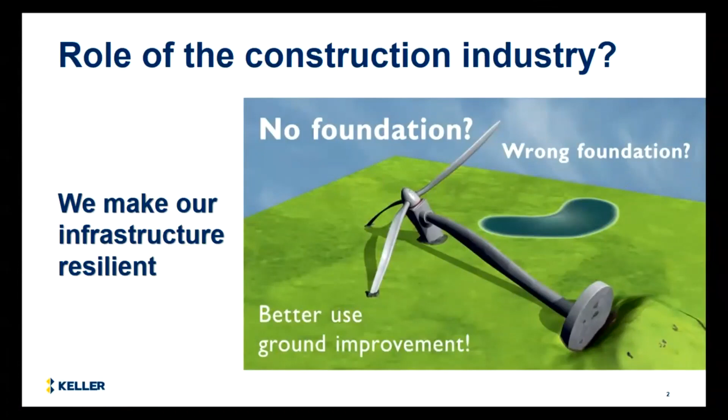Thank you very much. Well, I'm presenting the industry view on that and also recapping a little bit on the panelist discussion which we had previously. So we as an industry, what is our role? Our role is basically to build this resilient infrastructure. So that means we put piles or other elements into the ground where this infrastructure is resting on.

And well, you have probably seen a number of definitions for resilience, so I can skip this probably. The strange thing is, if you look into all those formal documents which we use for design, for example, into standard codes, and you are searching there for the term resilience, it doesn't really appear. So maybe you'll find it in a foreword, but it's not even a defined term. It's just used as a word.

There are other terms, and here you have a short view on what is coming, and the terms that are used are terms like reliability, and this reliability is probably the main term. So the main concept which is used in our current and future generations of design codes, and this covers safety, serviceability, as we have established in our previous discussion. That's a bit like performance, durability, and also there is another term, and that is robustness.

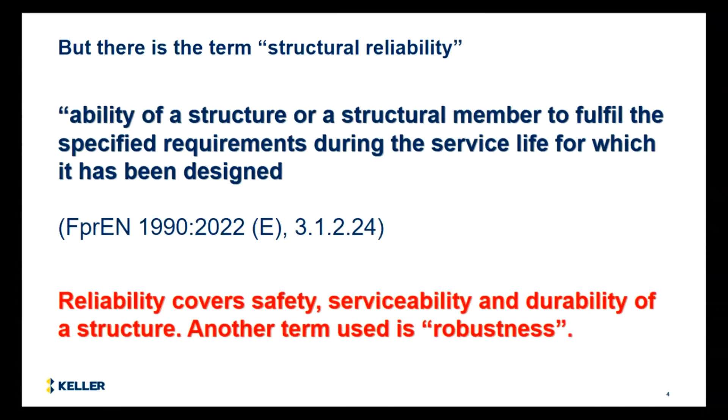Well, you know, currently, if you look into the codes, you have to make a design. First of all, it's ULS, and as a second term, SLS. Well, historically, of course, ULS has been the dominant one, and SLS was nice to have. That has changed. So already in the current generation of Eurocodes, ULS and SLS, I would say, are equally important. And as we have seen in our discussion, SLS most of the time is controlling our designs.

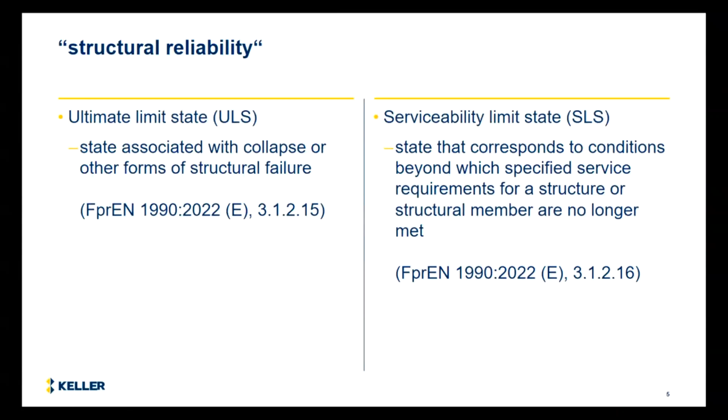So we install piles, and basically they would have a bearing capacity, but sometimes the deformation is limited, so I'm not allowed to use this design bearing capacity fully. And there are, of course, definitions for robustness and durability to be found in those codes. And as we have seen, most of the time, still this boils down to certain factors of safety, and those factors are then used to determine quantities.

So basically, what we as a contractor want to know when we go to a site is how much do we have to do for this project. So that means how many piles, what diameter, what length, how much reinforcement. And the, let's say, conventional wisdom is that if we stick to all those current regulations, we do nothing wrong, and the result is assumed to be robust, durable, so in other words, resilient.

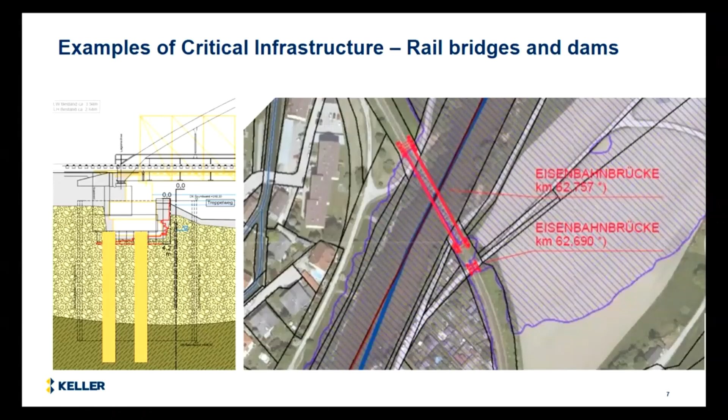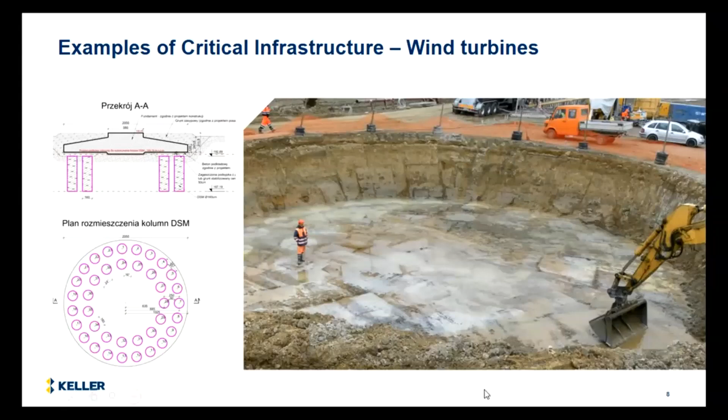How much cement do I need to mix into those columns so that I achieve a certain material strength which is sufficient? So in all those designs, the sequence is basically, I need to make sure that at least the internal force in my element is not exceeded, because once that would be exceeded, I would have something like a system change, because then the column crumbles and I have a different system. I want to avoid this. So this is also something that is covered by the way we do design today.

Of course, sorry, was a bit quick.

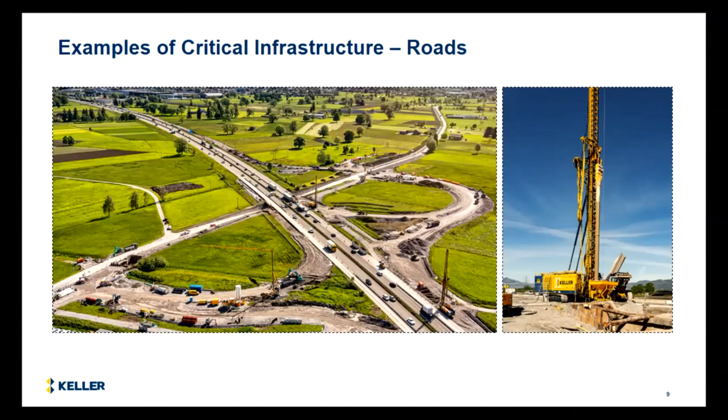Another critical infrastructure is tunnels. And of course, in tunnels you have to make a distinction, because the tunnel itself is a permanent structure, but to build the tunnel you have a lot of temporary works to do. So you have excavation support, which is only needed as long as the full tunnel is not finished. Once the tunnel is finished, either completely or at least large parts of it become redundant, obsolete. And the question is, can I make a distinction between temporary works and permanent works?

In Germany, we are used to that. Currently in our version of the Eurocodes, if you look into the tables for safety factors, we have 3 columns: one which is permanent, one for transient or temporary structures, and one which is accidental. If you look into the future Eurocode, at least in the original version as CEN is looking at it and trying to publish it, this intermediate line, temporary, transient, is disappearing. So the factors for transient and permanent, at least in that form, will be identical.

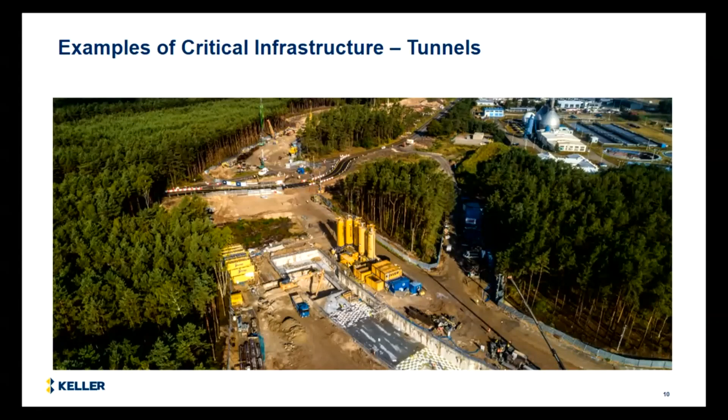And at the moment, we have a lot of ongoing discussion about whether we are allowed to reintroduce in our national version of the table this middle column with a transient or temporary verification case, as it's called now. And that has a certain implication, which I will come to a little bit later. And this implication has to do a little bit with those sustainability goals.

We as Keller have analyzed our carbon footprint a little bit, and those are figures from 2020. Our scope 1 and scope 2, that's about 176,000 tons of carbon equivalent. That's what we have found, summing up all our diesel consumption, electricity consumption, transportation, and so on. But scope 1 and scope 2 is probably far less than 20% of our whole footprint, because the majority of our footprint is buried in materials. So basically, the quantities we install in the ground control the carbon footprint of what we are doing.

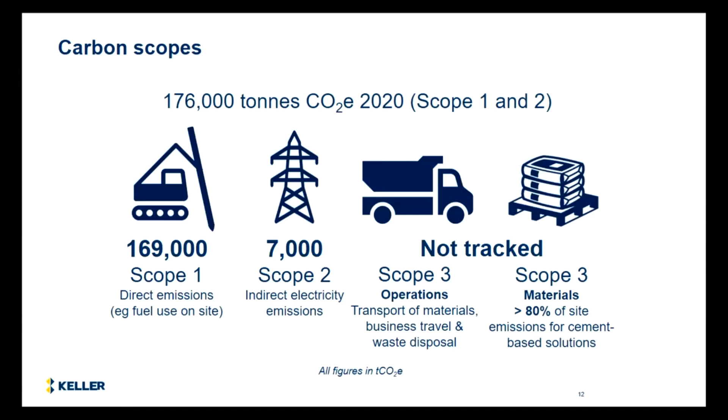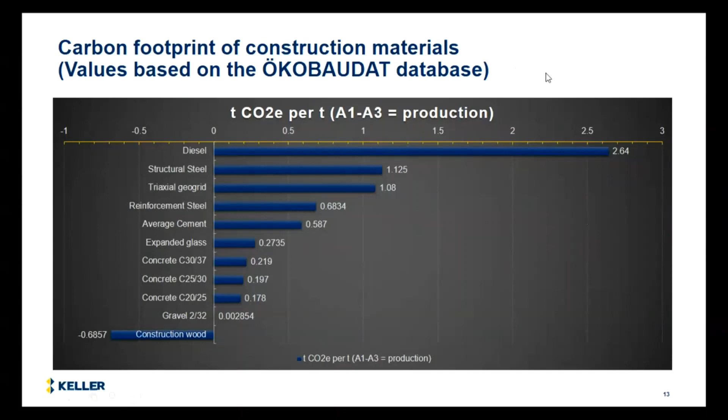Well, that sounds a bit theoretical, but it is also very practical. We as a company, we are stock listed, and of course we could simply wait for the governments to make some laws that would force us to decarbonize. But there is a different, let's say, actor which forces us to decarbonize, and those are investors. And those investors have basically brought us to this plan here. So we have to decarbonize, and here you see scope 1, scope 2, scope 3. So we have promised basically that by 2030 our scope 2 emissions will be 0.

So basically the electricity we will use. That's probably fairly easy because we just swap to renewable energies. Scope 1, that's a bit more tricky. So that's all the diesel, and that is up to 2040. So until then, and that is less than 20 years from now, we will have to find ways to power our equipment completely without producing any carbon.

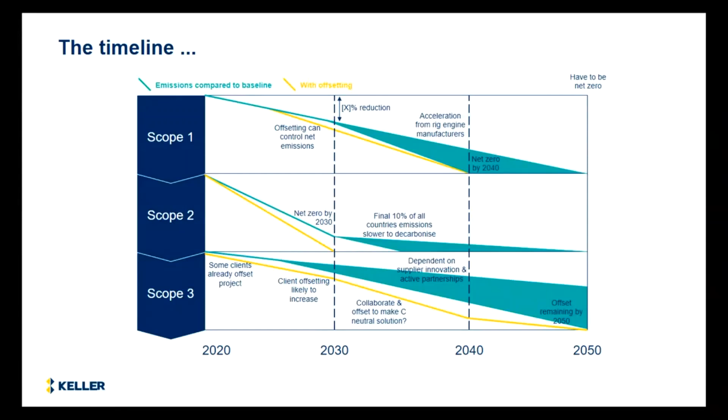And in 2050, so that means 28 years from now, we have to get rid of all the footprint that is in our materials. And that is the biggest challenge. First of all, because it's the largest part of the footprint. And second, of course, because it's also the most difficult to do, because how to replace cement, how to replace concrete, how to replace steel. That's a question where we don't have a final answer at the moment.

And so the question or the balance we have to find basically with all those things, with the quantities and sustainability, is of course a new balance between resilience expressed in robustness and durability, boiling down essentially to safety factors, and as a consequence of that, to quantities. So how much are we putting into the ground, and sustainability.

So do we spend a bit more on materials, having more resilience, but accepting a larger carbon footprint today, because today we have to build with today's technology for the next 50 years? Or do we accept presumably a bit less resilience, but save on carbon footprint today? That's a question where we need to find a new balance. And this is something we cannot answer alone.

This is something that needs to be answered by the whole community. So that starts from politics, over the owners of critical infrastructure. So what do they want? What do they order? And down to us, the builders of the critical infrastructure, how we are approaching this, how we are doing this in reality.